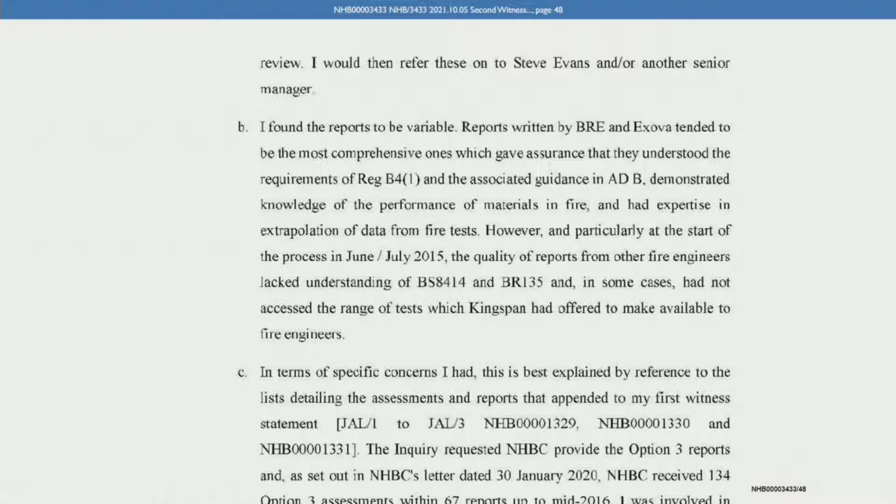What are you referring to there when you say at the start of the process in June, July 2015? Do you mean 2015? Yes, this was after the instruction had gone... Sorry. This was after we had gone through a list of schemes which were still in build as at the time we carried out a review of those schemes in around June, July 2015. After that was when the condition was applied on those schemes that they would not be signed off until an Option 3, Option 4 report had been received from a suitable fire specialist.

And that was the time that the condition went on all the jobs to hold them up so that they could not be signed off until this second review had been undertaken. Right, but that wasn't the start of the process of receiving and analysing and accepting or rejecting Option 3 reports, was it? Well, the Option 3 reports started to trickle in after 1st of January 2014 on the jobs which were working to the later BBA certificate for Kingspan. But there were not many because most of those jobs were still at very early stages.

The bulk of them came in, as I say, after the June 2015 review, after we went back through all the jobs that were in build and put on a holding condition to get their cladding reviewed again. I don't think I'm following this. Are you sure you mean 2015? Let's take it in stages. You say that they start to trickle in from January 2014, post change in the BBA certificate. You then put out BCA Technical Guidance Note 18 Issue 0 in June 2014, and you amend it in June 2015 precisely because BRE, Exova and Chiltern Fire had become overwhelmed by the number.

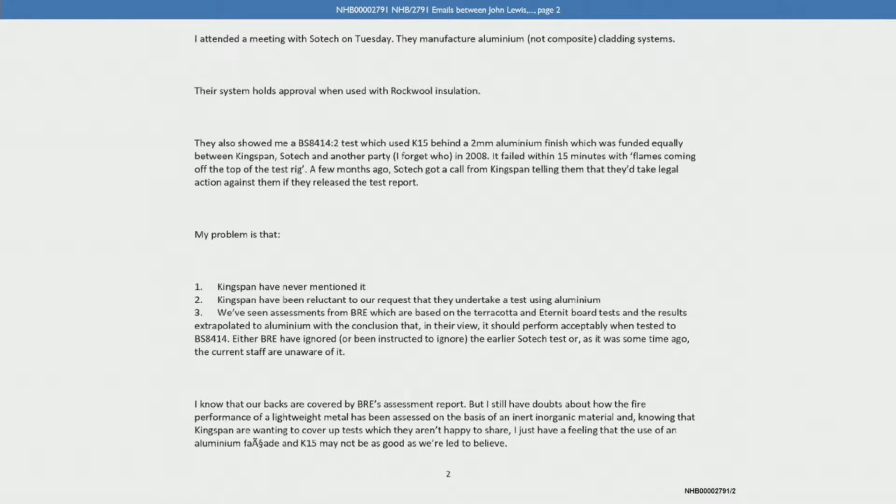Looking at the document on the screen and the reference to a test which was actually carried out with an aluminium panel and an assessment report which apparently, basing itself on data derived from testing an inorganic material, demonstrated that an aluminium panel would be acceptable. Did that inconsistency not suggest that the whole process of doing assessments was flawed, or might be flawed? It didn't strike me as such.

I mean, at this time, we also knew that you could follow option 1, build a system from materials of limited combustibility, and if you built them in a certain arrangement, they would still fail an 8414 test. Well, that's because you're testing a specific construction, aren't you? With specific dimensions and materials. But I'd have thought this was a rather worrying piece of evidence that a system actually being tested with aluminium failed, and someone comes along and says, I can show you that aluminium is satisfactory by reference to an extrapolation from some test on some completely different material. That was the situation we were in, yes.

Well, did it not prompt you or someone else to ask the question whether option 3 was actually a safe option? It didn't lead us to question the whole option 3 thing, but it did lead us to question this particular build-up. But in terms of the robustness of the option 3 system, we didn't change that. That continued. We didn't suddenly lose total faith in it or anything. We still considered it to be a method of showing compliance that was allowed.

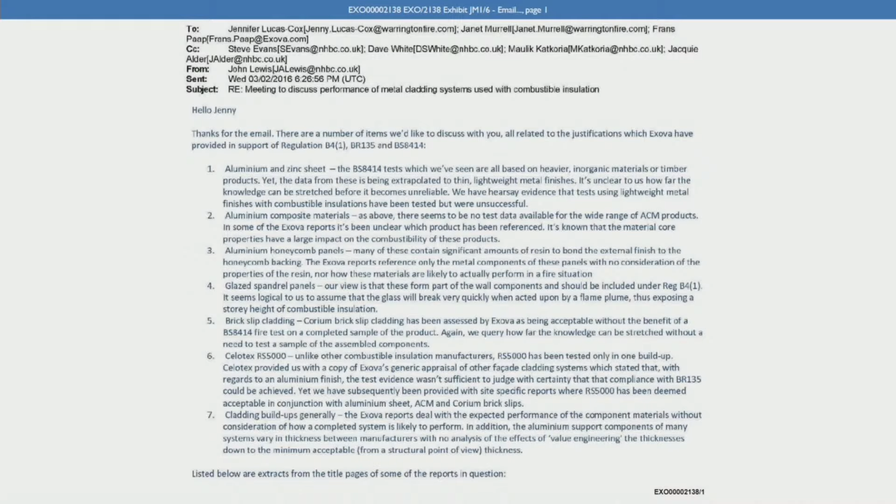Pausing again. What material core properties are you talking about? That particular one, we were referring to the more commonly seen ACM materials where the core can range from 100% polythene to a mix of polyethylene and mineral, or a mineral content. You just said 100% polythene. What did you mean? When I say polythene, it's a synonym for polyethylene. Is it? The same thing. Yes. Right. Well, that may simplify things later.

So you use the word polythene because you think that it's the same thing as polyethylene. Yes. The reason I use polythene is, unrelated to this, polythene was a commonly known term within the construction industry when talking about damp-proof membranes and things like that. Right. But to cut to the point, when you refer to core properties, you are including ACM with a 100% polyethylene core, a PE core. Yes, we were. Now, had any of the desktop reports from Exova thus far covered ACM PE?

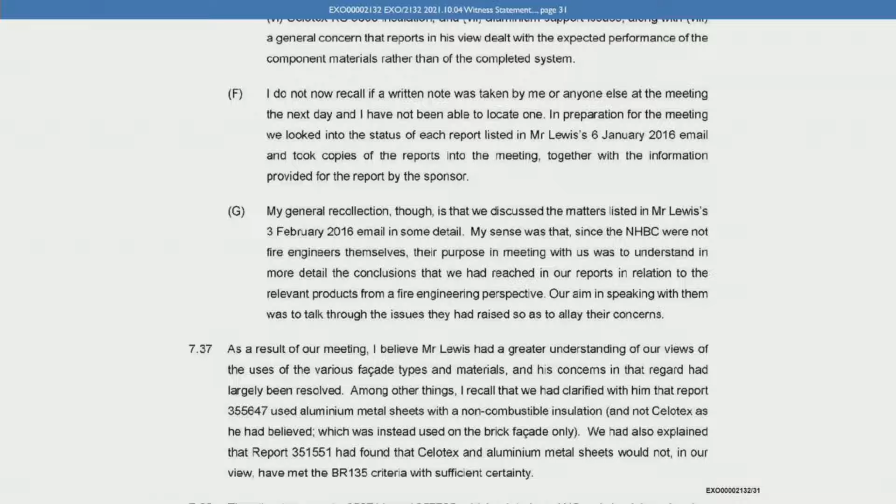Do you agree with Janet Murrell's recollection or characterisation of the meeting? Yeah, that generally ties in with my recollection, yes. Yes. Yes, and she seems to recall that the purpose of the meeting was to get a fire engineering perspective. If Janet Murrell and Frans Paap were not fire engineers, how would that happen? Well, they would use their other expertise in knowing how these things were done.

I mean, Janet did have a good background, I understand, in fire, having, I believe, been at the fire research station and things like this. She knew her stuff when it came to fire things as far as we were concerned. So I don't know for sure what her qualifications in fire engineering were. All I know is what I've read in her statement about her having the degree in chemistry. Yes, paragraph 2.9. I'm not sure I can illuminate you any further.

Right. And did it concern you at all that you'd come along to the meeting for a fire engineering perspective and were getting it from people who were not actually fire engineers? They were just people who, as you put it, knew their stuff when it came to fire things. Well, Exova Warrington Fire were generally regarded in the construction industry as, if there was a pecking order, it would probably start with BRE, and they would be a close second. Right. That if you needed advice on something fire-related, they were a good company to go to.

Yes. So this is really about brand management, isn't it? So you have Exova and can use the Exova name rather than the actual particular qualifications of the actual particular people producing the actual reports. My understanding was that they were very well-qualified people.

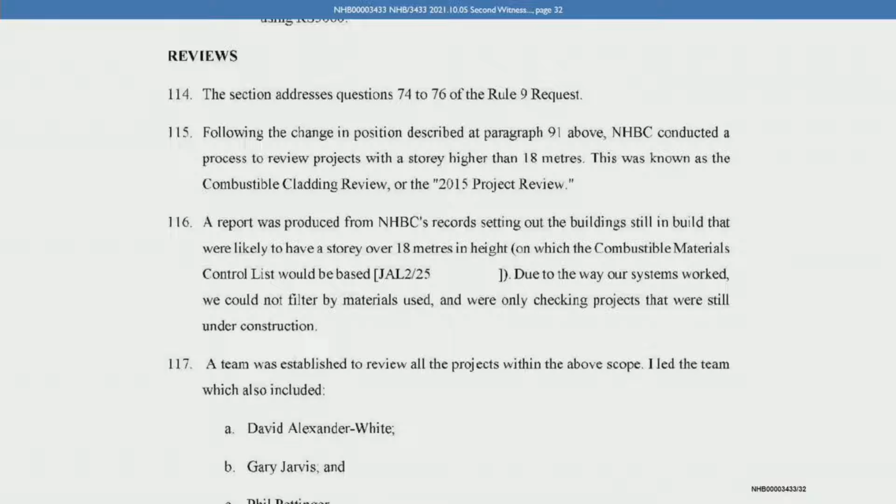It would be Steve and Diane. And why was that? Did you ever know what the reason was for that decision? Yes, because those buildings had been signed off. There was nothing really a building control body could do with a job that had already been completed.

Well, if you had, let it be assumed, discovered that those had been signed off on an erroneous basis, for example, because the surveyor had thought wrongly that K15 was a material of limited combustibility, why was there nothing that NHBC could do about it?

Well, many of them would have not even been NHBC's building control. No, but those that were. The ones that had, sorry, specifically the question again, please. Yes, absolutely.

Let it be supposed that you had discovered at this time that there was a legacy of buildings approved for building control purposes by NHBC's surveyors as an approved inspector, which had passed as compliant a building over 18 metres which had used Kingspan K15, not being a material of limited combustibility, in the external wall build-up. Why was there nothing that NHBC could do about it?

Well, there was nothing we could do because, as I say, building control legislation is such that once a building control body signs off a job, that is the end of any involvement they can have in that job. Building control cannot go back to a building that it signed off a year ago and say, oh, by the way, I think you need to change this, and we want you to change that. That was not the route to go down.

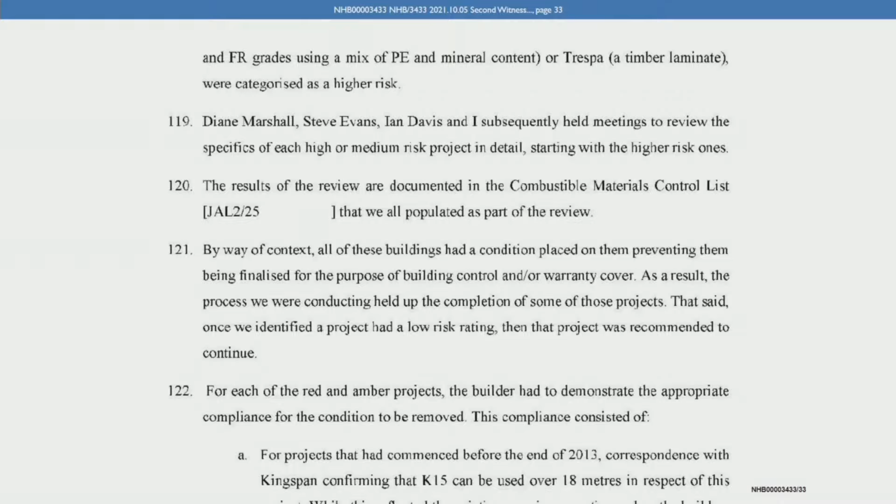Now, just pausing there, did any of the team other than you have any kind of fire engineering qualifications? They didn't have fire engineering qualifications, but they were selected because they had an awful lot of knowledge of this and other building-related matters. So especially Dave. Dave had a huge amount of knowledge of cladding systems, as did Phil, and as did Gary as well.

Who made the decision on which category a particular building would fall into? I believe I put forward some suggested categories to Steve, who accepted them. And how did you go about formulating your categories and deciding which buildings should fit into which category? I based it on my own knowledge of what materials were considered to be a higher risk and lower risk, such as we knew that brickwork was probably a lower risk, and actually the end of the scale would have been 100% PE core ACM.

Did you have set parameters, objective criteria with which to work, or comparative test data that you were using, or was this just feel? It was. I mean, this process was more of a screening exercise to go through the jobs and just give them a ranking based upon what I considered to be, as I say, high risk, medium risk, or low risk.

Now, we've seen that you refer there to ACM 100% PE core, or a mixture. Yes. Why would your customers still have buildings under construction using a 100% PE core ACM panel if NHBC was not accepting those products as a matter of course? There were still some that were slipping through, but not in most cases on a large scale. The areas of PE core ACM were tending to just be small isolated areas used as part of another cladding system or something of that manner.

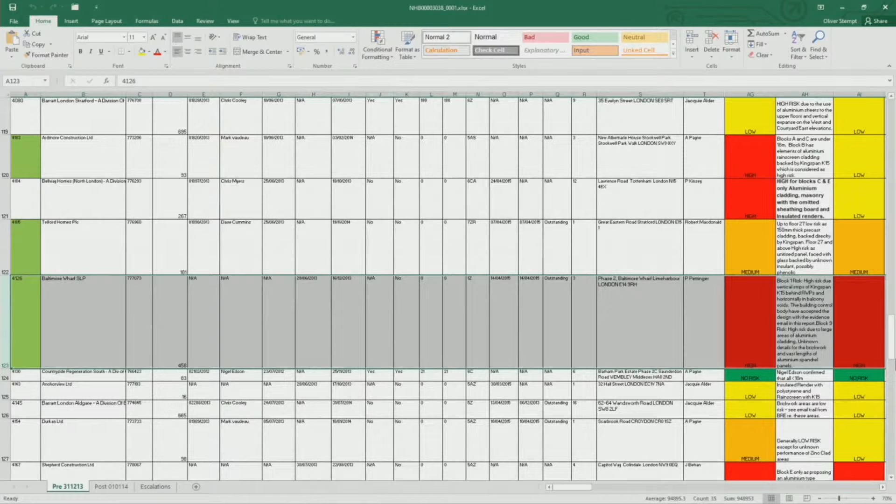No. Right. Well, let's go back to the first tab and scroll down then, and we can see a number of red-coloured high-risk buildings. You can see that just from the first page of the spreadsheet, yes? Yes. And they have a description of the elements of the external facade in many, in fact most, but they don't contain details of the exact materials, do they? No. Why is that? It was a screening exercise. It wasn't a full in-depth review at this stage. But was that information held somewhere in NHBC's system? Yeah. It was all on the jobs, but literally thousands of documents on every single one of these jobs.

Right. Do you know of the projects that feature in this spreadsheet, how many roughly were prevented from receiving final sign-off by you or by Steve Evans? Well, ultimately, it might help if I just can explain, say, line 121. Yes. The initial review, when myself and Phil and Gary and Dave were sitting in the room, one of us looked at that job and found that the architect was proposing an ACM by the look of it. Well, there was an issue on there that we considered this was a high risk. That stayed in column AG.

Then later on, myself, Diane, Steve sat around in a room, and then we went into each job to look more closely at the details and the arrangement of the building, and we obviously came to the conclusion that actually that one can be downgraded, and so that one went down to a low risk, and that was it. Thereafter the jobs would have been returned to the surveyor to do something with in the normal way. I see. So we can actually do the maths ourselves, can we, by comparing AG and AI? Yes. Those two columns, and seeing which remained red and which went to yellow. Yes. Initially, if we had concerns, it went as a high. Later on, we'd see if we could downgrade it.

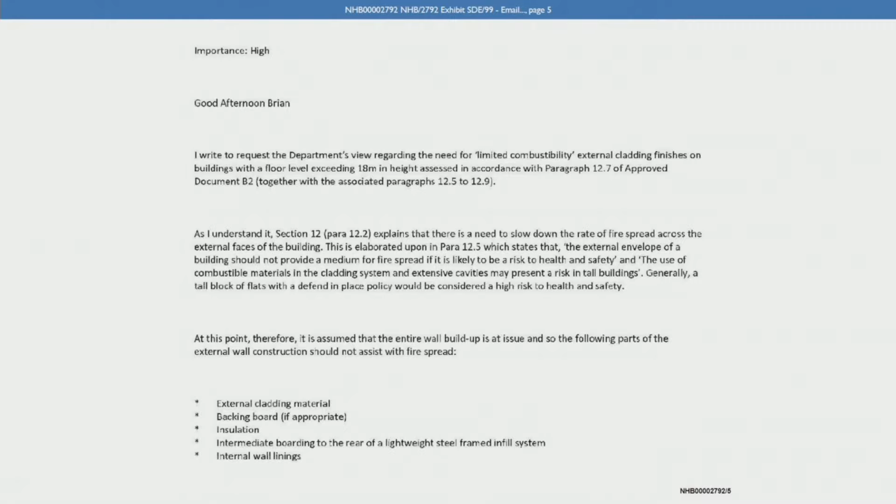It starts, "Good afternoon, Brian. I write to request the department's view." Are you familiar with this email? Yes, I drafted that email. You drafted it. And what prompted you to draft it? Steve asked me to draft it. And what prompted him, do you know? I don't know what prompted, but I think it was that we wanted once again to be certain that our interpretation of paragraph 12.7 included the external cladding panels finish system.

Right. Now, the date of this is 15th of June 2015. Do you know whether this email was written after the issue 1 of the BCA Technical Guidance Note 18 in 2015, in other words, the revised version, or before? Can we look at the dates again? What was the date? Yes, if you scroll up to page 4 at the very foot of the page, it's the 15th of June 2015.

When did we issue the... Well, I don't know precisely. I'm asking you. Do you know precisely when issue 1 was published? I can't recall if it was... No, I can't recall the timeline. Was this email written before or after you conducted the 2015 combustible cladding review? Do you know? No, this was written before it. Right. Now let's look at the email. It's long, but it's important, so we need to go through it.

Good afternoon, Brian. I write to request the department's view regarding the need for limited combustibility external cladding finishes on buildings with a floor level exceeding 18 metres in height, assessed in accordance with paragraph 12.7 of Approved Document B2, together with the associated paragraphs 12.5 to 12.9. As I understand it, section 12, para 12.2, explains that there is a need to slow down the rate of fire spread across the external faces of the building.

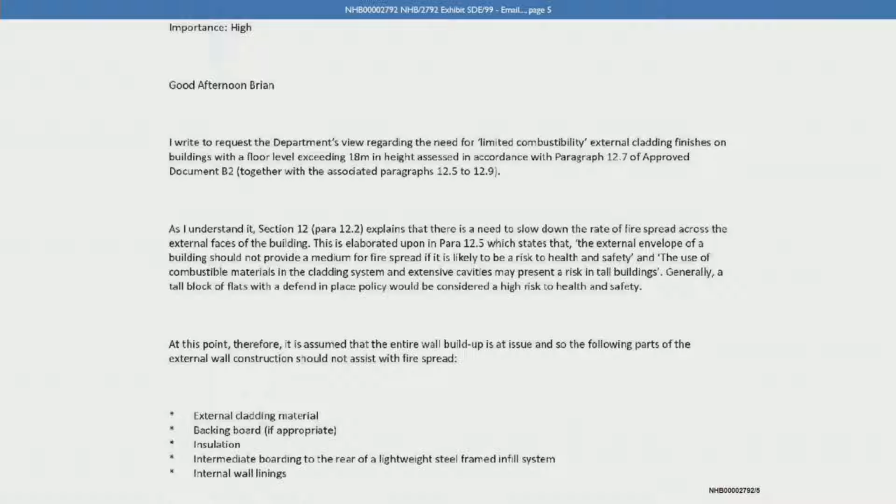This is elaborated upon in paragraph 12.5, which states that the external envelope of a building should not provide a medium for fire spread if it is likely to be a risk to health and safety, and the use of combustible materials in the cladding system and extensive cavities may present a risk in tall buildings. Generally, a tall block of flats with a defend-in-place policy would be considered a high risk to health and safety. At this point, therefore, it is assumed that the entire wall build-up is at issue, and so the following parts of the external wall construction should not assist with fire spread. And the first 2 bullet points cover external cladding material and backing board, and the third, insulation.

And then going further down, however, the wording of para 12.7 of ADB2 then goes on to state that in a building with a storey 18 metres or more above ground level, any insulation product, filler material, not including gaskets, sealants and similar, etc., used in the external wall construction should be of limited combustibility. See Appendix A. This restriction does not apply to masonry cavity wall construction that complies with diagram 34 in section 9. Whilst this paragraph is clear that insulation products are a risk to fire spread, firstly, it's unclear as to the meaning of filler products, and secondly, it is unclear whether it is intended that these recommendations apply to the external cladding finishes. The use of the word etc. implies that the major components of the cladding system need to be considered.

Whilst many cladding finishes fall within Table A7 guidance for "materials of limited combustibility", we have come across a large number which do not. And so, even with a Class 0 surface spread of flame rating, and when used with a MOLC insulation, the objectives of Section 12 may still not be met, even though the guidance in paragraph 12.5 has been met. Guidance in BS 9991 is more clear, stating that combustible materials should not be used in cladding systems and extensive cavities, see below. However, it also doesn't subsequently state that the cladding finishes should be MOLC when used on tall buildings. And if we go to page 6, BRE document 135, fire performance of external thermal insulations for walls of multi-storey buildings. The alternative approach to complying with the above clauses is clear that the external cladding finish and its interaction with the insulation is an important factor in the resistance to fire spread across external walls.

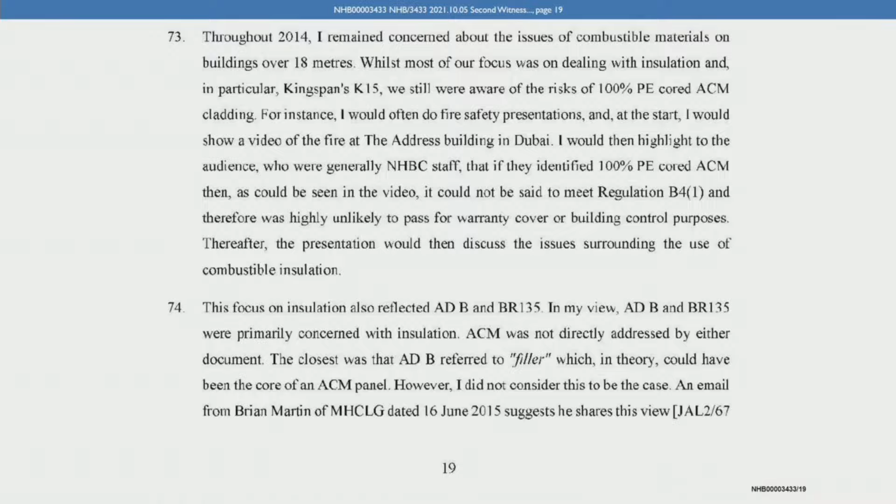Now, you address Brian Martin's response in your witness statement. If we look at that and go please to page 19 at the foot of the page, paragraph 74, you say there in the second sentence, ACM was not directly addressed by either document. You see that. And then you go on to say the closest was that ADB referred to filler, which in theory could have been the core of an ACM panel. However, I did not consider this to be the case. An email from Brian Martin from MHCLG dated 16th June 2015, which we've just seen, suggests he shares this view.

And then over the page to page 20, Mr. Martin indicated that the reference to filler was to address filler being placed behind insulation, such as polystyrene filler, to take up the gaps. Given that Mr. Martin headed the ADB review process, I was comfortable we were focusing on the correct issue.

However, irrespective of the wording in ADB, I was clear in my own mind that the manner and rate at which 100% PE cored ACM burned could not be interpreted as meeting the wording of Regulation B4. Now, just to be clear,

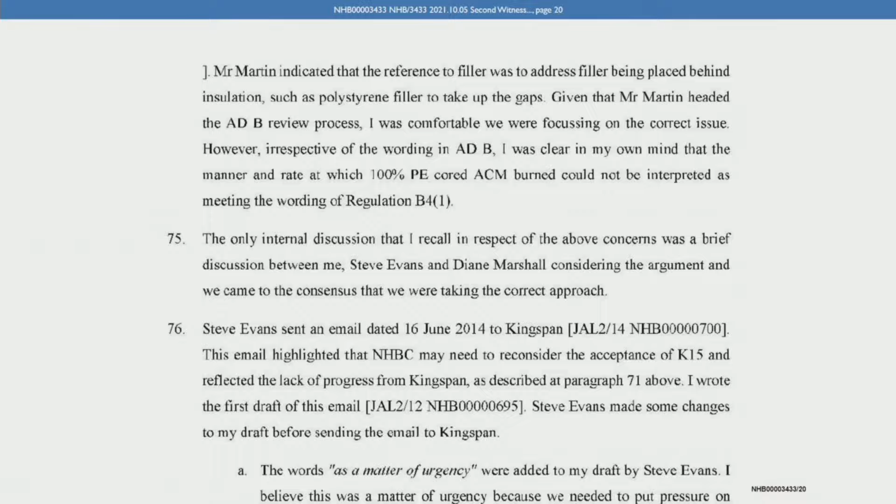is it right, you didn't think the wording in ADB was clear, and you essentially made your own decision, or came to your own conclusion, that B4 related to all elements of the external wall, even though it didn't explicitly say so? Yes, and to back that up, the words we put when 9991 was up for review, we put to them the words which made specifically that it did include the external cladding panel. Yes. And they were incorporated into the later version of 9991.

And Steve Evans told us that he'd always had that view, regardless of what filler meant. Was that also your understanding? Yes, we were clear. We knew what we thought, yes. Did you know which project Brian Martin was referring to in his email when he refers to the EPS foam being used to fill a void? At the time, no, I just assumed it was one in London. Right. I think it was actually one in Manchester. The Edge, Salford, 2005. That's what I believe from this inquiry. Right, not from your involvement at the time.

No. I follow. Now, you say in paragraph 74, as we've seen, irrespective of the wording in ADB, I was clear in my own mind that the manner and rate at which 100% PE cored ACM burned could not be interpreted as meeting the wording of Regulation B4. Just at the end there. Are you saying that 100% PE cored aluminium could never be used in any situation, as it would always fail to satisfy the functional requirement, whichever route to compliance was adopted?

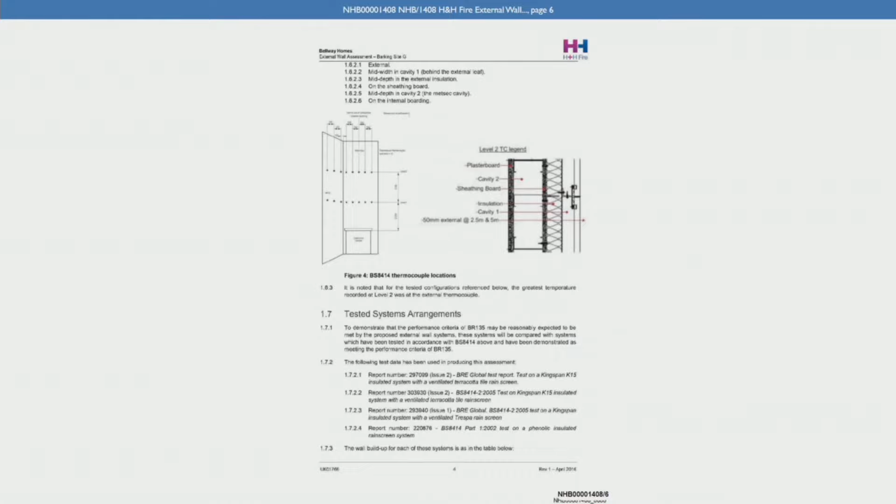Well, let's just look at some of the option 3 reports you refer to as part of the significant number you looked at in preparation for the 2016 guidance note. NHB00001408. This is an option 3 report completed by H&H Fire for Bellway Homes on the 21st of April 2016. And the development was Barking Site G, as you can see, cores G, NO1 and O2. And if we go to the bottom of page 6 and the top of page 7, you can see the tested systems arrangements which were used in producing the assessment.

And if you go to the top of page 7, you can see that 4 BS 8414 tests are referred to there, yes? Yes. They work across the page, and the test numbers and details are there. And these are all tests sponsored by Kingspan for K15, aren't they? Yes. And the insulation proposed at Barking Site G was K15, yes? I can't recall, but more than likely. Yes, well, I think we could probably get that from the middle column. External cavity insulation, K15, K15, K15, and then K18, but that should be 15, that's a typo. Take that from me. I don't think there is such a thing as K18.

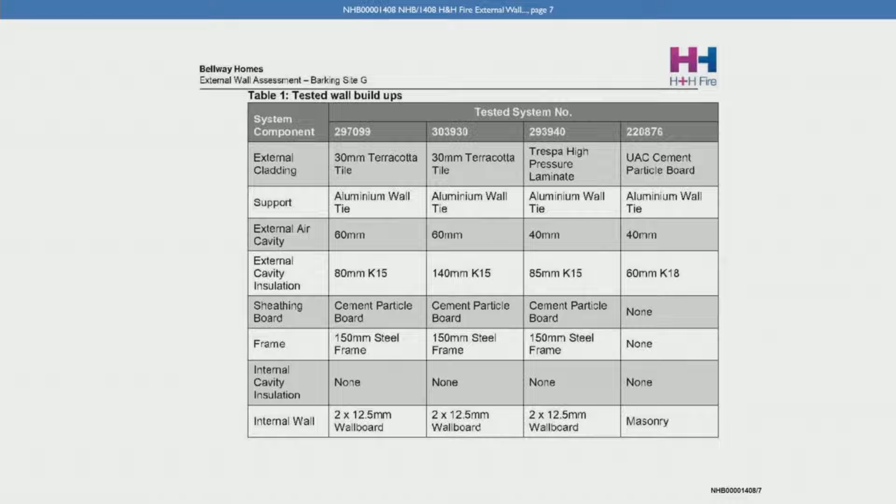Were you aware in 2016, when H&H's report for Bellway Homes was written, that the third test referred to there, the Trespa high pressure laminate test, number 293940, was a failed test? Yes, we knew that. You did? Yes. Did H&H know that it was a failed test? Yes, I mean, BRE refused to issue a BR135 for that test.

Indeed. And we don't see anywhere in this report where H&H mentioned that fact. Do you accept that on its face, the reader of this wouldn't know that? No, because H&H were fire engineers. As I say, you read the report, you saw it was terminated early. If you knew BS 8414, the terms under which early termination of a test happens, that was all there. They knew it. I'm sure they knew it. But failed tests did still reveal useful data.

Should H&H not have set out the basis on which they were relying on data from a failed test? Well, we didn't have set parameters of how we expected them to write these. We left it up to them to provide an expert report. Were you aware of how the failed test on a Trespa laminate sample gave confidence to the report writer and allowed them to compare it with a system using, for example, Reynobond ACM?

Well, it did reveal data. A lot of this was you compare between these reports. By comparison with that one with the terracotta report, a lot of the build-up is largely the same up until the point of the K15. Then the cavity width is slightly different and the external finish was different. One of those tests passed BR135, one of them didn't. That would allow a fire engineer to then home in on why one passed, why one didn't, and to what extent the test was affected by the Trespa panel.

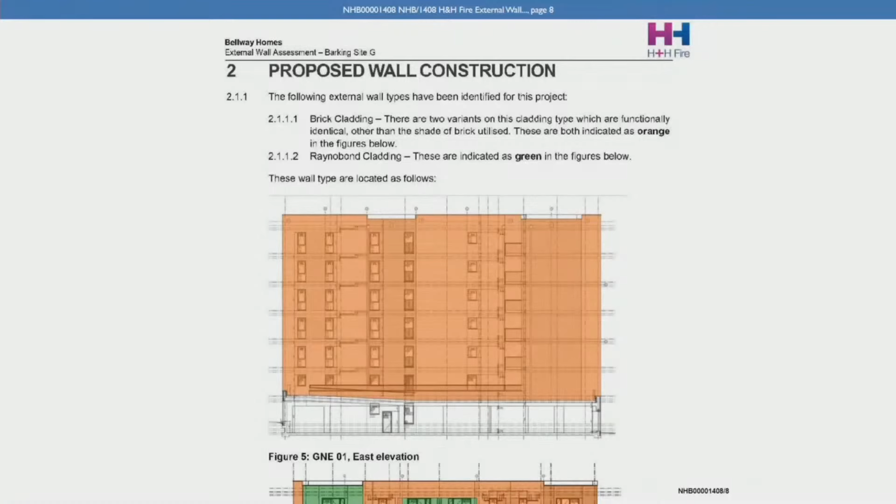Well, let's look at this. You can see if you go to page 8 that under paragraph 2.1.1, the following external wall types have been identified for this project. The first one is brick cladding and Reynobond cladding, indicated as green in the figures below, and you need to scroll down page 8 to see the green. You can see where it was on the building, where on the west elevation there was Reynobond, you see? Yes.

And if you go to page 15 and following, you have the fourth kind, which is Reynobond rain screen cladding. General: this type has not been tested to BS 8414 to determine whether it meets the performance criteria of BR135, but will be assessed based on option 3 of the BCA technical guidance note, i.e. a desktop study to consider whether similar testing can be extrapolated to conclude that if tested, the proposed build-ups would be expected to achieve the BR135 performance criteria. Yes? Yes.

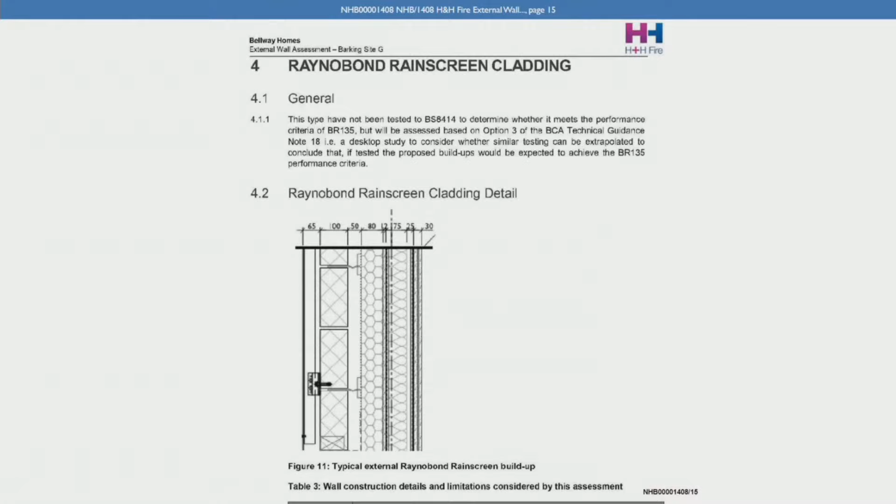And then if you look at the next page... Could I just point out on that image there? Yes. There was a blockwork. The Reynobond was fixed to a blockwork. Well, exactly. That's the point I was going to make. Given that it's fixed to a blockwork there, it's not a vented cavity, is it? No. Well, yes, the cavity between the back of the Reynobond and the front of the blockwork is a vented cavity. It's very small. It's 65 mil.

And then on page 16, assessment against tested systems, you can see what's said under external cladding and support systems there. Which paragraph, sorry? 4.3. Yes. And then 4.3.1, 4.3.2 and 4.3.3. Yes. Identify the difference between the testing arrangements and the proposed arrangements found in the cladding materials. The tested cladding systems were either a 30mm thick terracotta clay tile or a 6mm thick cement particle board, each system supported upon aluminium railings, whereas the proposed cladding was a 100mm blockwork system with a Reynobond screen.

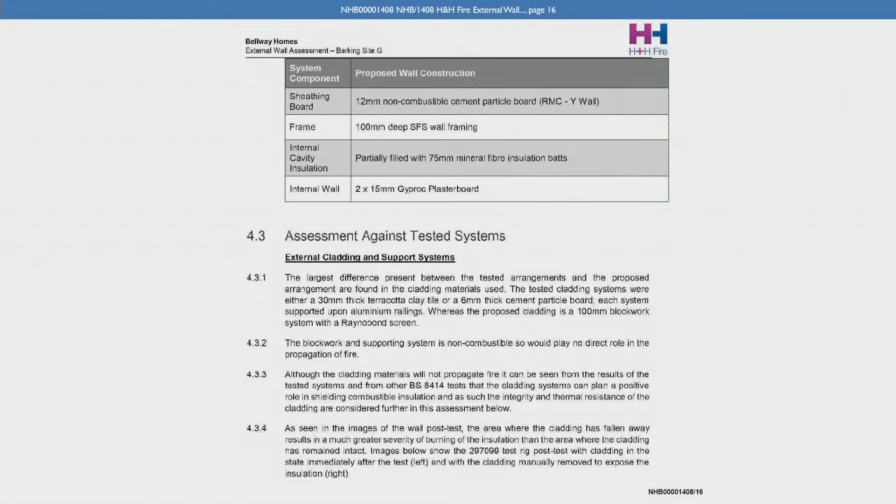Just pausing there. They're a bit different, aren't they? Yes, they are, but the incorporation of a blockwork would generally lead a fire engineer to consider that it was going to perform better than the tested arrangement.

I think that's what they say in the next two paragraphs, isn't it? And the third paragraph: although the cladding materials will not propagate fire, it can be seen from the results of the tested systems and from other BS 8414 tests that the cladding systems can play a positive role in shielding combustible insulation; as such, the integrity and thermal resistance of the cladding are considered further in this assessment below.

Now, what do you know, and what were the reaction to fire properties of this Reynobond panel, which allowed credible technical comparison between the failed TRESPA test and that of the proposed system? The TRESPA was a Class D. The FR version of Reynobond was a Class B. We knew that from the Reynobond data sheet, and in this job we went back to site to say, please can you confirm exactly which version of Reynobond was supplied to site, to check that it was the FR version rather than the 100% PE core version.

Well, that's exactly right. They hadn't specified what type of Reynobond cladding was being used, PE or FR, had they? They hadn't, no. So as a standalone, this is, in that sense, useless. Well, this is why we went back. We went back and said, tell us exactly which one has been used. Was it only the fact that this was a Class B panel, assuming it to be FR, that gave you confidence that it was going to behave the same as a TRESPA panel without knowing anything about its surface spread of flame properties or heat of combustion, or matters of that nature?